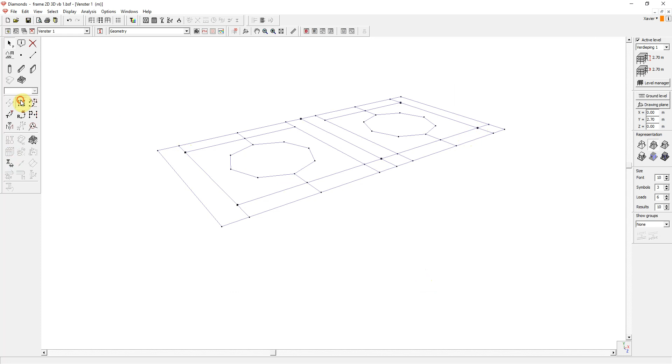Having the points still selected, I go to the extrusion function. The points need to be extruded over 2.2 meters in vertical direction and downwards, of course. This corresponds with the y-axis, as you can see in the global axis system. So we need to enter dy, and it will be a negative value because the extrusion needs to be opposite to the positive y-axis. So I enter minus 2.2 and I click OK.

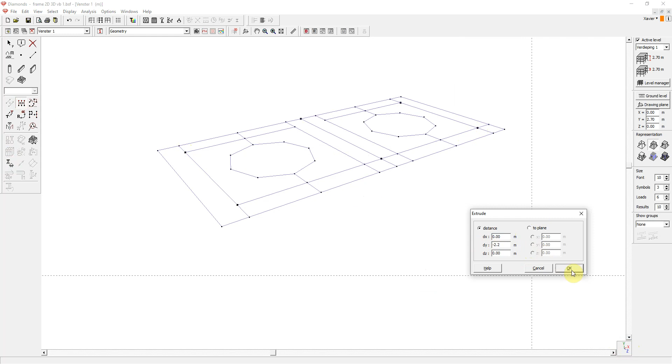And the columns are created. Now the new elements are just empty lines. You still need to assign a cross-section and material.

Now what if the structure is not horizontal but inclined? Well, I'll move on to the next example. This is a different beam grid, but with a clear inclination, as can be seen in the front view.

First of all, I remove all the supports by selecting them with Shift and freeing all the nodes.

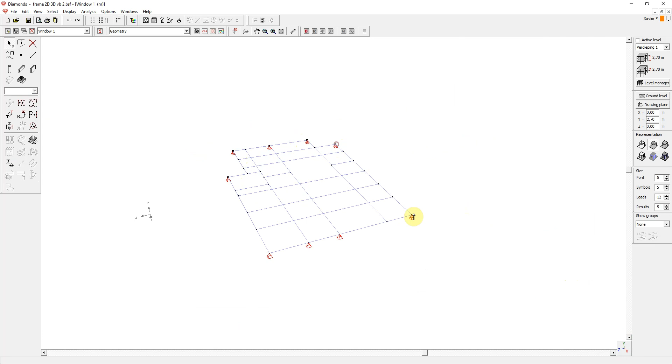Having the point still selected, I go to the extrusion function again. I enter a distance of minus 2.5 meters and I hit OK.

Problem now is that all the lines have the same length, but they do not end at the same level as probably desired. This would mean that you have to modify each individual column length to get them leveled. Luckily, we have a solution for that.

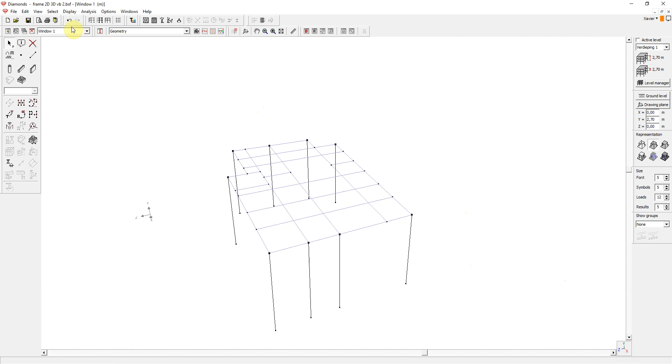I start over using the undo function. We use the extrusion function again, but this time around I choose to plane, and let us choose as the ground level 0 meter, for example, and I hit OK. Now when we look in a front view, we see that all columns end neatly at the same level.

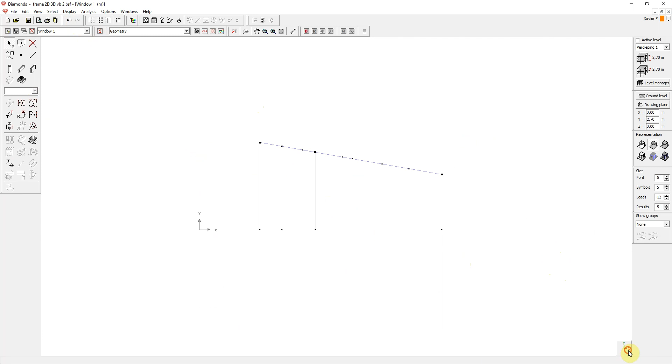Next example, a 2D steel frame, 2 columns and a roof, a very simple model, and these elements will become the gantry girders of an overhead crane. The frame is horizontally supported out of plane.

In this model, I remove the supports, but only those out of plane. The supports at the bottom of the columns, these ones, I want to keep. So this can be easily done in the front view. I select these elements and remove the supports.

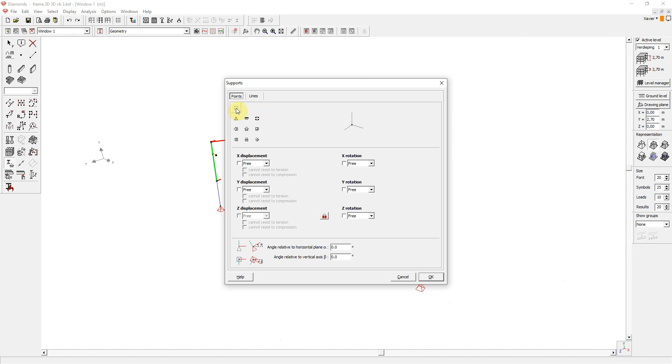Now I select the whole model and I go to the translation function. Now, translation literally means translocation, so moving, but we do not want to move the frame. I enter a value of 8. That means we will copy the frame 8 times.

Let's say we copy the frame in the Z direction, which is logical, out of plane, 4.5 meter. This will be the spacing between the frames. And very important now, I switch on create connecting lines, as this will automatically generate the purlins and the girders.

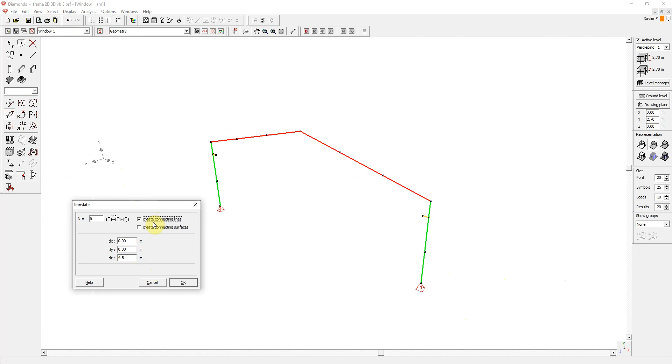The translation function will now work as a copy plus extrude command. And I click OK. Each point of the 2D frame is now extruded except for the supports. Points or lines with supports assigned are ignored in the extrude part of the translate function.

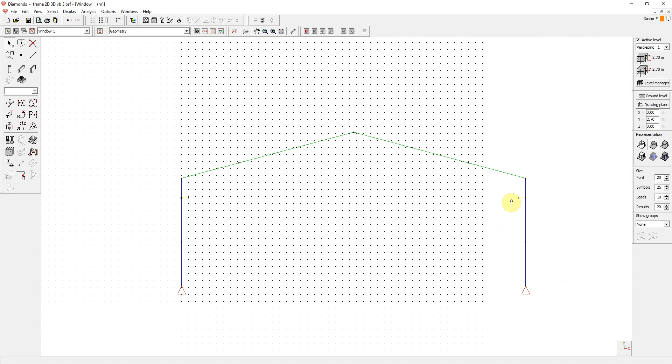You may have noticed that these lines have been created too much. We can easily remove them by drawing two selection frames in a front view, one over here, and I'm holding the shift button down, another one over here.

Let's go back in 3D view to see what is selected. That's exactly what we wanted, and I hit delete to remove them.

Let us add some facade columns now. I can use the extrude function for that. So I select this node, this node, this node, this one, and one over here.

I'm launching the extrude function. We need to extrude to plane, which is of course logical because all the columns will have a different height. And I can, you see the cross lines on the screen, I can indicate the coordinate of the plane directly on screen just by clicking.

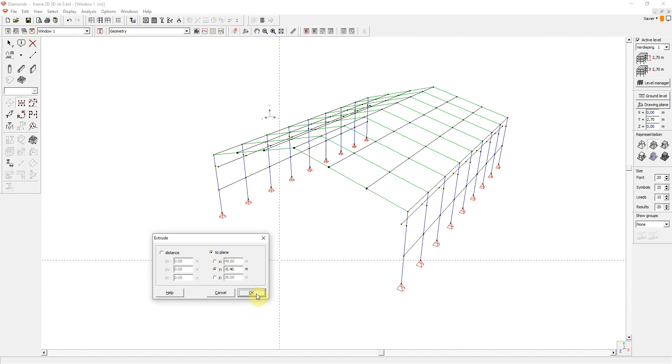We want them to be the same level as the other columns, of course. I click here, and of course we need a Y plane, and we hit OK. The columns have been created.

I can now select the bottom points and add supports. Simple supports, and I hit OK.

We can copy these facade columns to the other side by means of the translation function. So I select the columns. We go to the translation function. I will make one copy, no connecting lines.

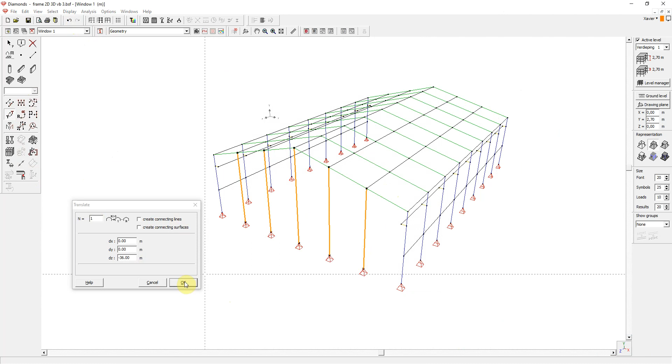You can set the translation value by indicating the copy distance directly on screen. Just like that. You just draw the copy distance and we hit OK.

And it's that simple really to create a 3D industrial hall in Diamonds. Remember that all new created elements are just empty lines. You still need to assign cross-sections and materials.

Last example is the creation of a dome. And we start with an empty geometry screen. I create a point on a random location. Let's say over here.

Now I will create a half a circle in the XY plane with a radius of 5 meters. I only need half a circle, so the end angle is 180.

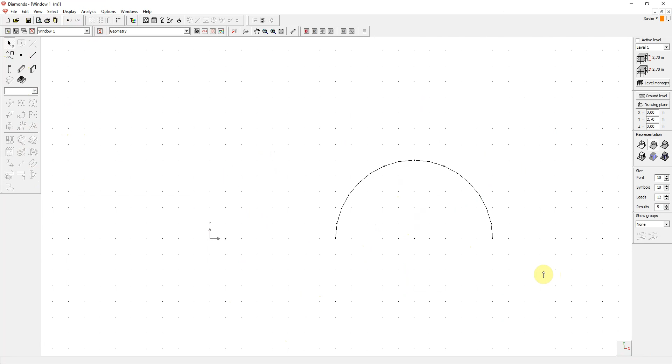Actually, I only need a quarter, so I will delete this part as well as this point. I will add a support at the bottom, simple support again, and let's move over to 3D view.

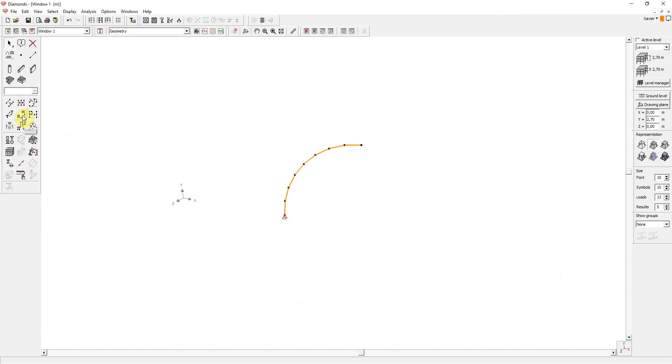Now we will use the rotation function. I select everything we have right now and move over to the rotation window. The rotation plane is XZ, which is OK. N is the number of copies and has the same meaning as in the translation function. We set this to 12.

The center point of rotation is this point on top, and I just indicate it directly on screen, and the coordinates will be filled out. The angle is 30 degrees. And very important, of course, here again, create connecting lines, and I hit OK.

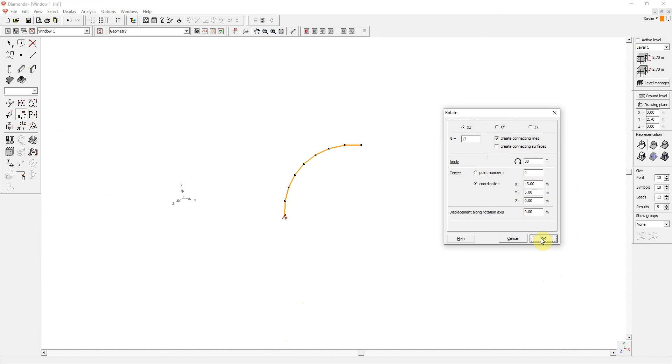And here's the result. You can now add cross sections to the elements and materials and continue with the design. And that's how easy you turn 2D frame models into 3D structures with Diamonds.